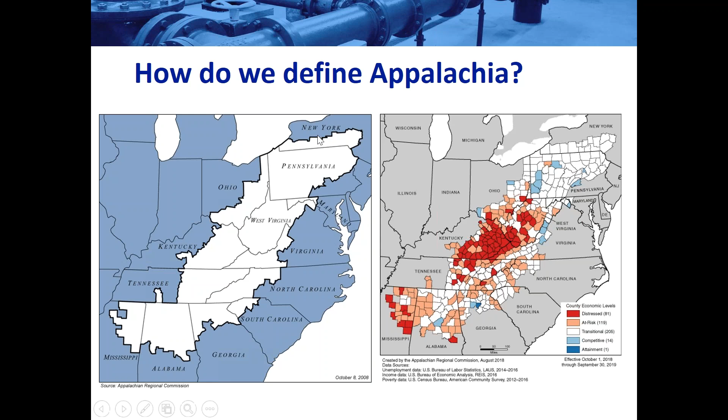Okay, so we've defined Appalachia. So why talk about Appalachia? Well, it's because another project we're doing is a program evaluation of a portfolio of projects related to water and wastewater infrastructure. As part of that, we're looking in depth at each individual project, but also charged with looking at innovations in water systems. Although this content is directed at Appalachia, because it represents so many small systems with demographics similar to other systems across the country, the content seemed appropriate for a broader audience.

Okay, so first polling question—I'll pass it back to Tess, but I'm curious what you guys think of when you hear innovation.

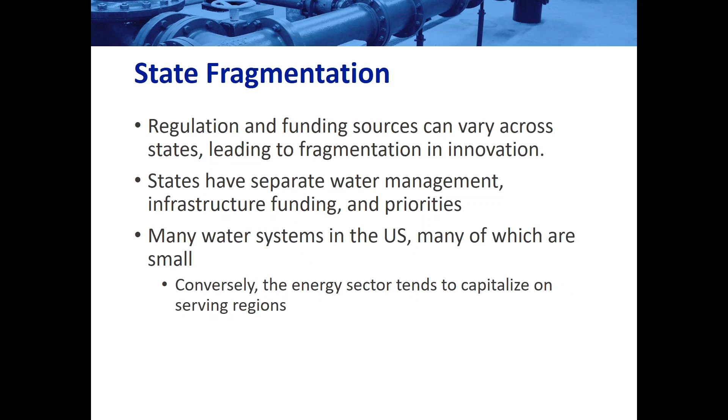And finally, there's state fragmentation, which I mentioned earlier, but it leads to fragmentation in the innovation itself. States have separate water management, infrastructure funding, and general priorities. And there's also, as everyone knows, many water systems in the United States, many of which are small. So it's harder to capitalize on some of these regional innovations that might work on a larger scale.

Okay, so with that, I'm going to transition from innovations to the actual case studies. Up until now, I talked about more scholarly examples as to why it might be challenging to innovate. But there are other things that can be pursued outside of just these kind of scary things you might hear about on the news. That's obviously a prohibitive thing. The media likes to highlight things that go wrong and not necessarily the things that go right. So I hope that through the next examples, I can show some cases where things went right, and maybe some cases where things went right but some hurdles came up along the way, but it ended up okay. So hopefully this webinar will provide a little more optimism in terms of how to overcome some of these barriers and how to be a little innovative.

Okay, so moving on to case studies. These case studies will hopefully provide some interesting examples of what's out there with little capacity or effort involved.

But before we start, just a disclaimer: again, this webinar is not intended to be an endorsement of any innovative solution. They're just examples, all of which have pros and cons and may or may not be appropriate given the situation at your system. So it's important to keep that in mind. Just because it works out at one system does not necessarily mean it's right for yours, or vice versa. If it did work out for someone else and you were to pursue it, it could be something that's right for you, but it's just something to keep in mind.

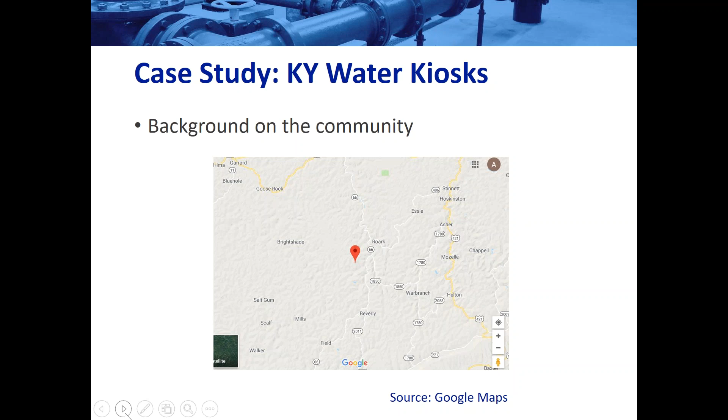And see if maybe that would give me a better idea of what this area looked like. Again, even at this zoomed out level, you can tell that it's mountainous, that it's rural. It's a little unclear the size of the neighboring towns, but this is obviously a really small community. It's not a densely populated area.

This final map helps give a little more context on the location. Basically, it's north of Knoxville, east of the Daniel Boone National Forest. But again, this doesn't give you a lot of context on who lives there, what the community actually looks like, or what I'm actually talking about.

So that's where I'm going to transition to next. To give a little more background on the community, I picked Beverly, Kentucky when I was looking at population sizes, just because it was the closest community nearby. But I just wanted to show side-by-side satellite images here.

On the left, that is the Red Bird Mission, the site of the water kiosk. On the right, you have London, Kentucky. London, Kentucky has a population of about 8,000, a little bit larger, and still relatively small, not super highly populated. But you can tell by looking at these two satellite images how little infrastructure exists near the Red Bird Mission site.

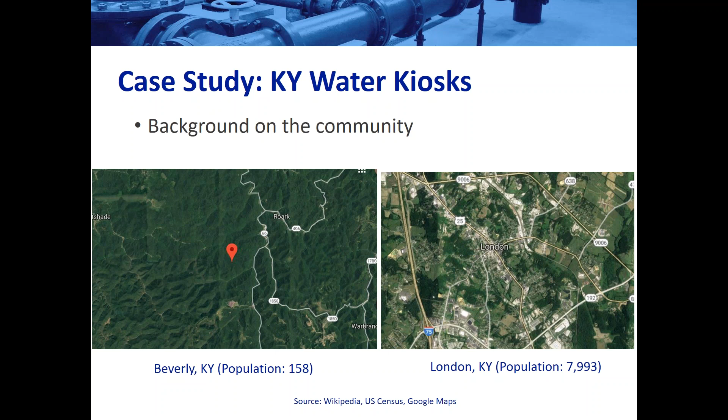More generally, Clay County, where this water kiosk is, in 2010 had a population of about 21,000, and the median household income was about 16,000. Approximately 39.7% of the population was living below the poverty line. It was known as one of the poorest counties in the United States, and in 2010 the Washington Post called Clay County the unhealthiest county in Kentucky, and the New York Times called it one of the hardest places to live in the United States. So sorry to start with a little pessimism, but it really sets the stage for how this all came about and why the innovation was so successful here.

So what led to the implementation of this innovation? Generally speaking, what was the problem? I already talked about how small the population was, but it also had a declining population, low median household income. There were pretty serious water access problems, not to mention watershed contamination problems. There was some water testing conducted between 2012 and 2014, and 64% of the testing sites exceeded EPA standards for E. coli.

Basically, it's a difficult region for septic systems, given the steep terrain and the soil itself. So there are some concerns about straight piping and human waste making its way into surface water, which was contaminating some of the surface water in the surrounding area. In addition, many people within the community were on private wells, which made it challenging from a public health and monitoring standpoint, because there was really no way to ensure that their water was safe to drink.

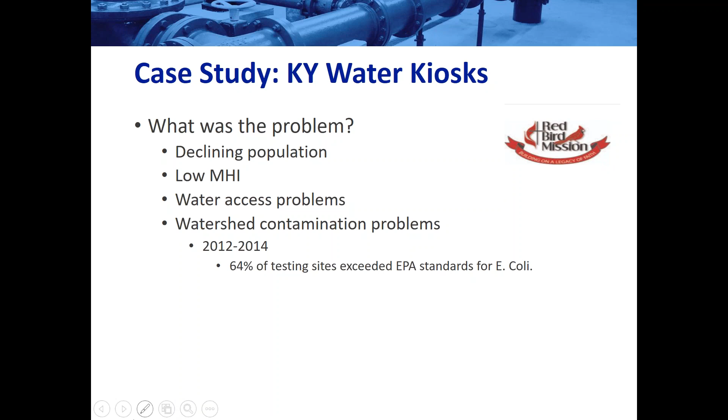Previously in the community, they had tried to undertake a similar distribution strategy to a water kiosk. Years ago, there was a local church that built a well water kiosk, but there was heavy usage, and the church wasn't charging for the water, so they couldn't afford some of the actual monitoring that the state required, and the overuse drained the well. So that previous effort failed, unfortunately.

But based on that, the community decided to reach out. They reached out to the University of Tennessee, and a big, very interdisciplinary group with a lot of different backgrounds came together and tried to see out the process. The team's goals in general were just to share knowledge with the community, to look at the problem holistically, the biological, social, and environmental health standpoints of the actual problem.

The team determined that there was an urgent need for access to clean water, just because of the myriad of environmental and water quality issues that they saw while they were there. There were also concerns about the connection between clean water access and health, particularly the health of Clay County, which Washington Post described as one of the unhealthiest counties in Kentucky, as well as the fact that because people weren't confident in the quality of their water, they were seeking out things like sodas instead, and there were some concerns about diabetes and obesity in the community. So it was a lot of problems all combining to lend itself to this innovation.

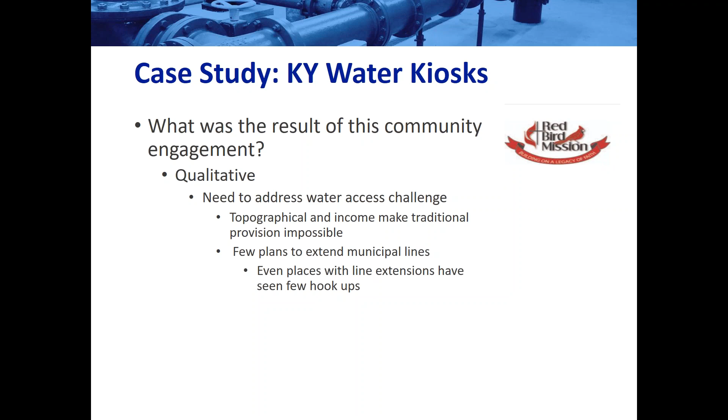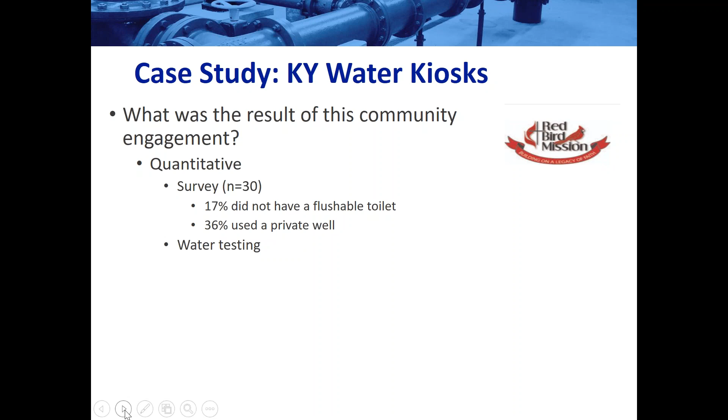Moving on to the more quantitative side, they asked some pretty strategic questions on the survey. It only had 30 responses, but it was a household level response. They were asking how many folks had plumbing in their homes, how many had access to municipal water, and then they did some actual water testing. As you can see from the survey results, 17% didn't have a flushable toilet, and 36% used a private well. Obviously this is just a sample, not the entire community, but hopefully it's representative.

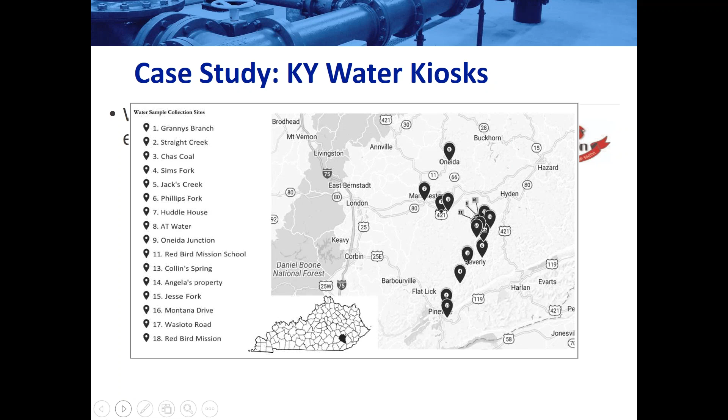Moving on from the background, we're getting into the actual innovation now. So what did the design look like? As the University of Tennessee team was collaborating on this, they really wanted to create a place that had a sense of community, that met all the needs, but also was easy to access.

They came up with a group of ideas, and this is the one they went with. They tried to keep access to it by keeping it adjacent to the road so people could get to it easily. They put a cover on it so that if people walked up wanting to get water, they had a place to stand if it was raining or the weather was poor.

They also added what they considered a community aspect, which was 4 bays added to the side of the water kiosk so they could conduct a local farmers market there, in hopes that it would be a place that gave people identity, which is the last element. They also added a wooden screen, basically trying to dress it up a little so it felt like a place people were proud of and would consider visiting.

An environmental engineer on the team, who had experience with water kiosks in developing countries, helped guide discussions with community partners to gain approval for this system. The idea was to tap into an existing county line that was routinely monitored for purity and fluoride content.

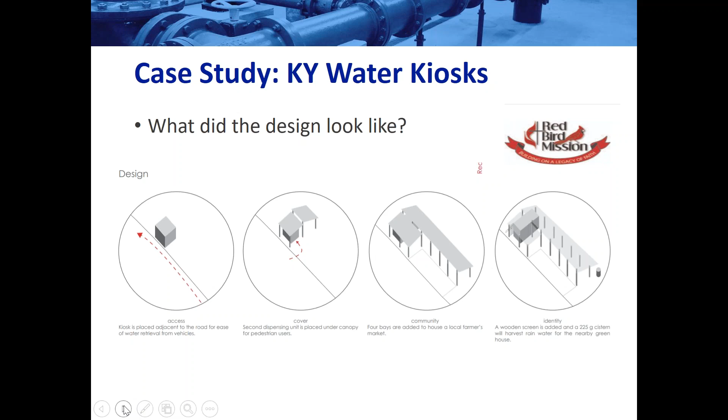So what does the finished product look like? Students at the University of Tennessee at Knoxville came up with these design concepts. It started with 5 design concepts, and based on community input, they tried to create a community space. This was very much a back and forth with community members to ensure they had their say in what the final product would look like.

It was actually built over an alternative spring break. I don't know how many people are familiar with that, but basically over spring break, undergraduate students do some sort of service learning experience. In this case, those students went out and actually built this kiosk.

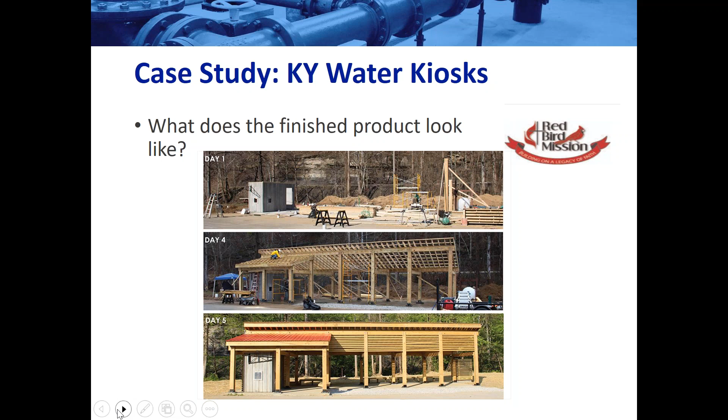Going into more of what it looks like, the next few slides are just photos of the finished product. This is looking at it from the side, and you can see benches around the back, places for people to gather, as well as a sign that says Redbird on it. This is the other side - you've got the rain barrel, the benches, the bays for the farmer's market, and you can see it's running right adjacent to the road.

The question is, who was or is served by this? Because of this kiosk, according to the University of Tennessee's website, 9,000 families in Kentucky now have access to clean, fresh water. In total, 150 people worked on this project, and it took 3 months to dream up and figure out the design and implementation of this water kiosk. But it actually only took about 1 week, the alternative spring break, to actually build it.

So the important part, right? I told you a lot about the background and the design itself, but what really matters is, can it be replicated? There are obviously some serious limitations with this case study, particularly that water isn't provided within the home - there's still the expectation that people have to go and get water themselves.

Also, local stakeholders were really invested in seeing this through, and they had familiarity with it because of other water kiosks they had implemented previously. Not to mention the fact that there was the Red Bird Mission willing to take on the challenge. But again, this is Appalachia - it was a rural community, it was a coal town. There were serious water quality issues, and all of this was really coming together to mean that innovation was necessary if people wanted access to clean water.

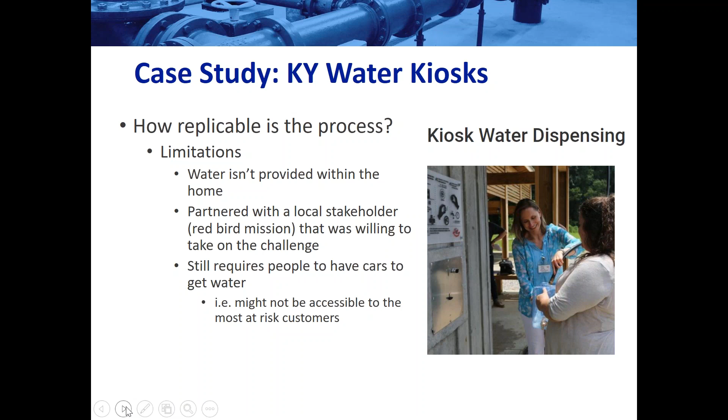We knew that the costs were prohibitive during the first try, and that's why it didn't really succeed. So how are they paying for it?

This is actually straight from the Redbird Missions website, a screenshot of it. It says: safe, clean water filling station provided at a minimal cost of 5 gallons for a quarter, located across from the community store. Obviously it's not a super detailed description, but that's how they're paying for it. Also, if folks don't have clean water containers, they do have that link there, so they provide those as well for people who might come up and need water but not have anything to store it in.

To date, we've largely seen these in developing countries, but for communities with a unique set of challenges, it could be feasible. As I was doing my research, this was something that folks who worked at the University of Tennessee and community members wanted to see in other places, specifically communities they were aware of with similar challenges. So it could be something we see more of in the future. The idea was that the architectural drawings, the design, could be shared and implemented in other regions with similar concerns.

So with that, I'm going to move into the second case study, which is a little bit different. It's basically what I'm considering a non-traditional partnership model, a nonprofit called Dig Deep, headquartered in downtown Los Angeles. You may or may not have heard of them. They've gotten a lot of media attention from NPR, from the New York Times. Also on their website, there's a video of Michael Phelps supporting them, so obviously they've reached a pretty wide audience.

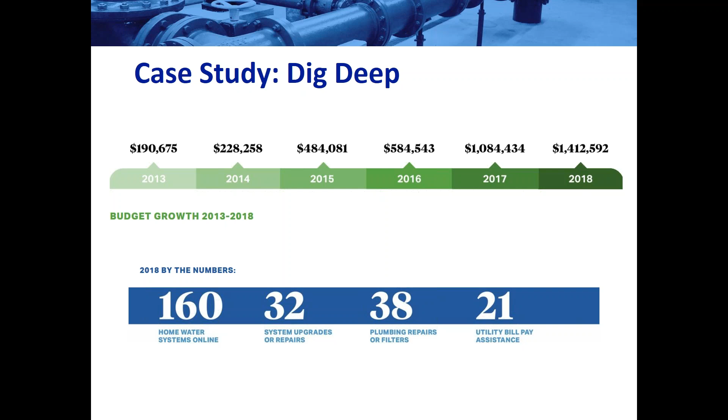So they have 4 current projects: the Navajo Water Project, the Clean Water for St. Michael's Project, the Bring Baby Lisa Home Project, and the 4 Liters Challenge. In general, their projects fall into 2 buckets. There are the water access projects, which are essentially building and managing low-cost systems in what they consider a community-led solution. And then they have education and advocacy projects, where they're trying to connect people to their water, and create a deep and lasting connection to the water we often take for granted.

The project I'm actually going to talk about in terms of innovation is the Navajo Water Project. But the Clean Water for St. Michael's project is designed to get clean water to a special needs school. The third project was to try to get water and sewer to a home where a child had a serious illness. And the fourth project is just education and outreach, essentially aimed to help people recognize what living with water scarcity really looks like.

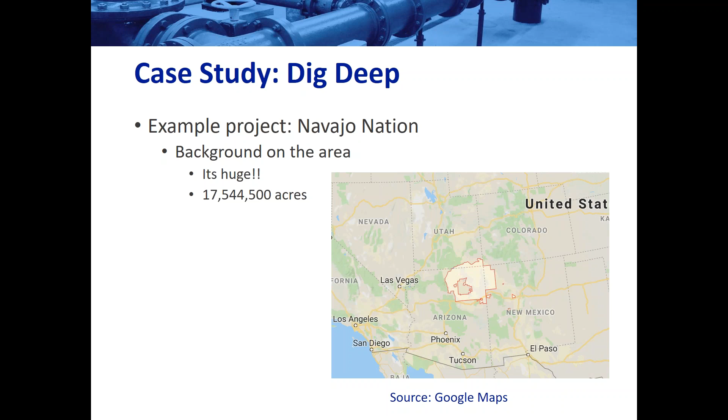Okay, let's talk about the Navajo Nation. First of all, it's huge. I don't know if people are aware of that. I feel like you think about it expanding a pretty large area, but the Navajo Nation is really large. Not that this means anything, because 17 million acres doesn't mean much, but it's 17 million acres, so it's really large.

In general, just kind of general context and background, population is about 350,000, but not very densely populated, only about 13 people per square mile. And the average household income as of 2016 was about $27,000. The average household size is about 3.5.

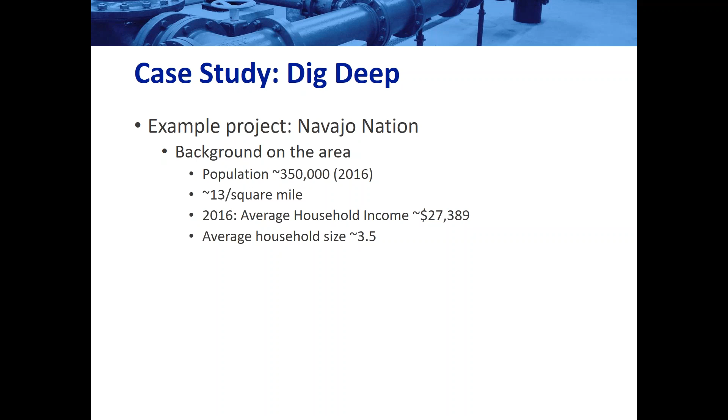Okay, so the actual project itself, what does it look like? There's a link here you can look at afterward if you want to dig in more, but basically the problem they're trying to address started with a smaller project, but it's since expanded now that they've realized how expansive the need is. According to their website, 40% of Navajo families have to haul water every day, and they pay 67 times more for the water they haul versus piped water.

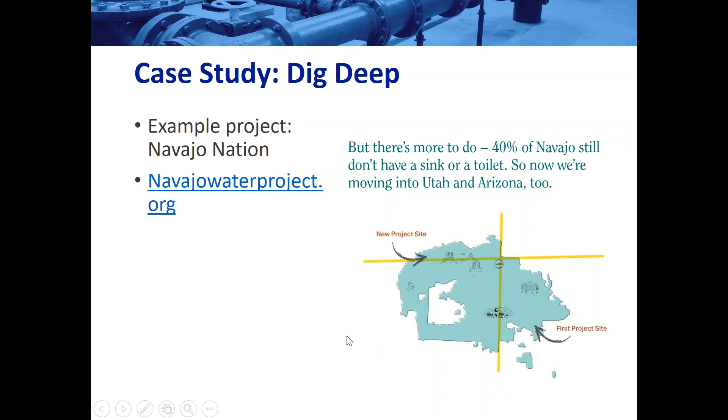So they have what they design, or advertise as an innovative system, which is a community-managed utility alternative that brings hot and cold running water to homes without access to water or sewer lines. They describe it as the first system of its kind in the United States. Again, I'm not an engineer, but I do know, based on information I found while conducting these case studies, what that looks like. So these are the four parts they describe as their innovative system.

They create wells where they develop new sources, where water is pumped, treated, and stored locally. They deliver water in food-grade trucks. They also create home water systems that can provide up to a certain amount of hot and cold running water, and they use solar power. And then, much like the Water Kiosk Project, they really pull in the community, making sure the community is part of all the decision-making along the lines of the actual project, so that they're invested in it and in the end result once DigDeep is no longer there.

And just for reference, they've raised about $485,000 to bring running water and solar power to a remote town in Utah within the Navajo Nation.

So how replicable is this process? There are obviously pretty serious limitations. For one, there's not a lot of information on the actual system they've implemented in terms of the engineering behind it. Again, I'm not an engineer, but even that was kind of coating the surface. In addition, they're a nationwide nonprofit, and the need is much more widespread than their ability to reach everyone. Even with a budget of about $1 million, it would be really challenging to meet everyone. Not to mention that the Navajo Nation is very unique, and the challenges there may or may not be analogous to other areas of the United States. But it is a really interesting group that's trying to bring to light a lot of clean water access challenges in the United States, and they probably have a whole list of interesting contacts and great ideas.

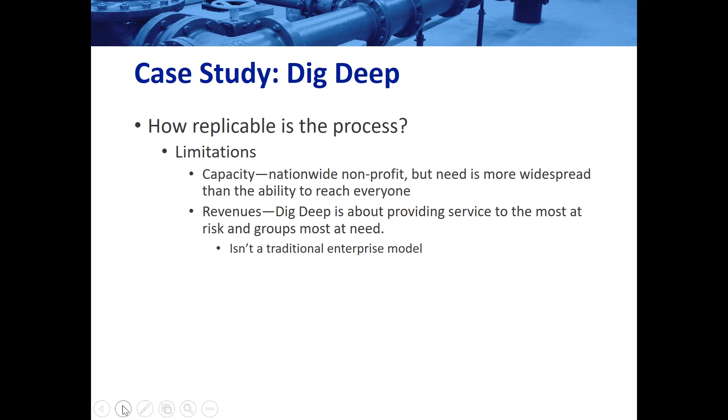So in a sense, they're a non-traditional partnership because they're a group that's doing a lot within the field and seems really motivated to see measurable change. I'm going to talk about this generally because I don't have a ton of time, and there are a couple other case studies that I really wanted to highlight.

NADO conducts a lot of projects that I would consider innovative. That link is essentially to their website which gives a general overview, but they've invested in a lot more innovative water infrastructure projects than I've just listed here. There are several more on their website. The most interesting one, in my opinion, and one that's actually analogous to Appalachia, is the Georgia LIDAR project.

For people who don't know, LIDAR is a type of mapping technology. It stands for light detection and ranging. They coordinated a project involving 22 counties, 3 cities, and 5 regional commissions, using LIDAR for flood mapping and to acquire data for infrastructure related to water, wastewater, stormwater, gas lines, and things of that nature. It's an interesting example of using an RDO, a regional development organization, as a partner on the project, and implementing innovative technology to plan to be more resilient and to plan for infrastructure. It's just an interesting partnership that I was otherwise unaware of.

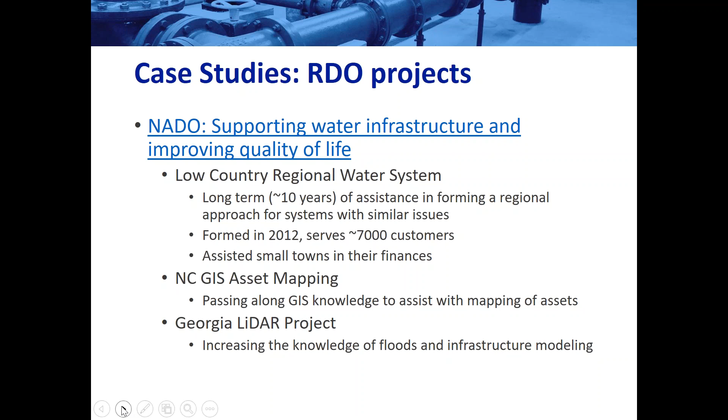The next case study comes from the project portfolio we have through ARC, and it's an example of innovation based on state priorities. This case study took place in Byrdstown, Tennessee. It had a population of about 800 in 2010, and according to their records, they serve about 5,000 people, and were suffering with pretty significant water loss. They're also considered a distressed county, so for ARC purposes they qualify for more funding, but that also means that in terms of their socioeconomic status, they're struggling relative to the rest of the United States.

The project was completed in 2012. It was an ARC project, with total funding of about $625,000, aimed at addressing water loss. They conducted a water loss survey between July 2009 and June 2010, averaging about 45% water loss and peaking at about 55%. That was a huge financial burden for both the utility and the ratepayers. So this case study, this example of a project, was addressing water loss and recovering some of those costs.

The project itself, in terms of being a revenue case study, both addressed a problem and also helped recover some of the costs associated with actually funding the infrastructure that was motivating this change in water loss.

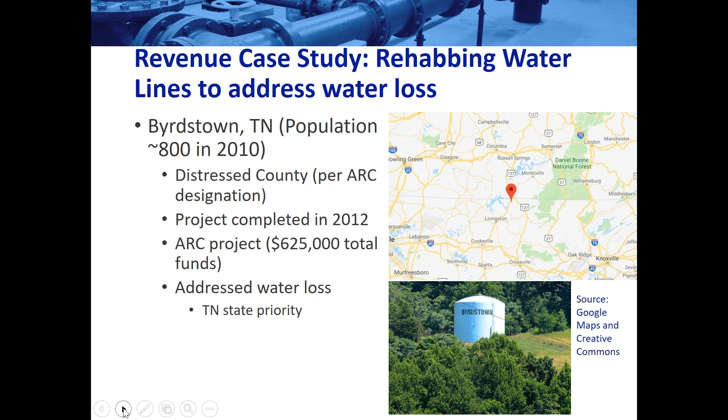So this one's kind of cheesy, I'll say that at the forefront. One of the things I always recommend is using your own data. Be innovative with your revenues by using data that you have on hand and that you can easily get.

Rate setting is very much an art. There are a lot of things you can look at when considering setting your rates, looking at affordability, looking at things like inflation, looking at your billing records and consumption allowances. There are many, many ways that you can go. This isn't an exact example of a case of that, but you can do it yourself. You can use data to think about crafting rates as an innovative financing tool.

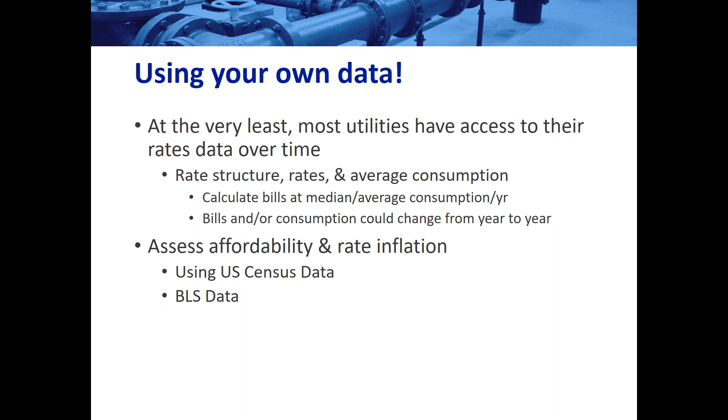The final group of case studies are related to partnerships again, but more so regionalizations and mergers. They're going to be informed by this report from the U.S. Water Alliance, and there's a link at the bottom if you want to learn more after the fact.

The first case study, and really the one that I'm going to dive into, is the Logan Todd Regional Water Commission. The reason I chose this one is because it's in Kentucky. Ironically, it is literally just west of Appalachia, but it has some of the similar demographics and background. The outline of Appalachia is pretty set in stone, but that's not to say that the counties next door don't have similar issues.

For some context, Logan County's population in 2010 was about 26,000. Todd County's population in 2010 was about 12,000. They have a similar median household income of around $30,000.

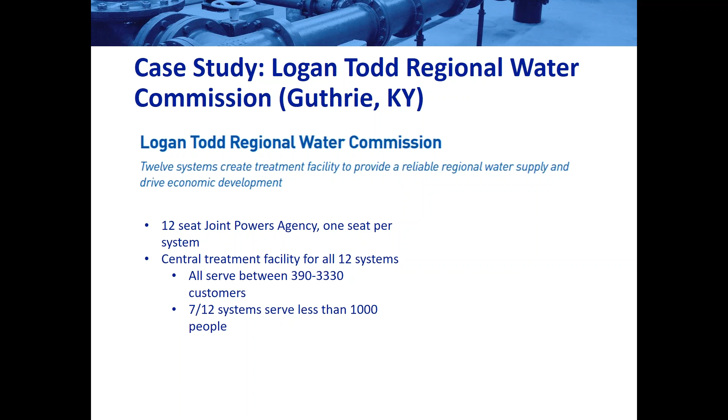It's a 12-seat joint powers agency, and each system has a seat. And that central treatment facility covers all 12 systems. Each system serves between 390 and 3,330 customers, but most of them are very small, serving less than 1,000 people. As a result, from a financial standpoint, it equalized the wholesale rates for all 12 systems, regardless of their size or location.

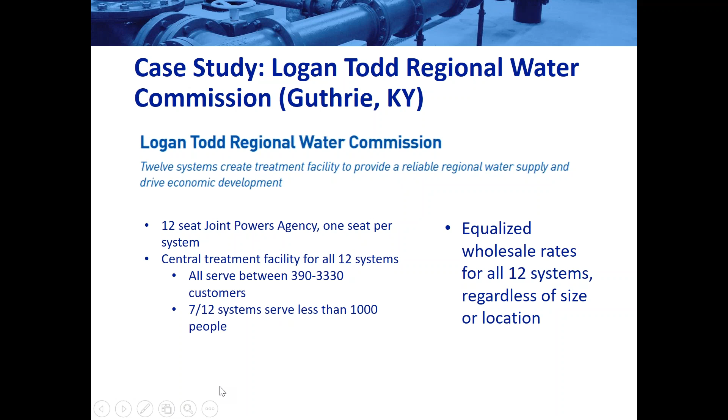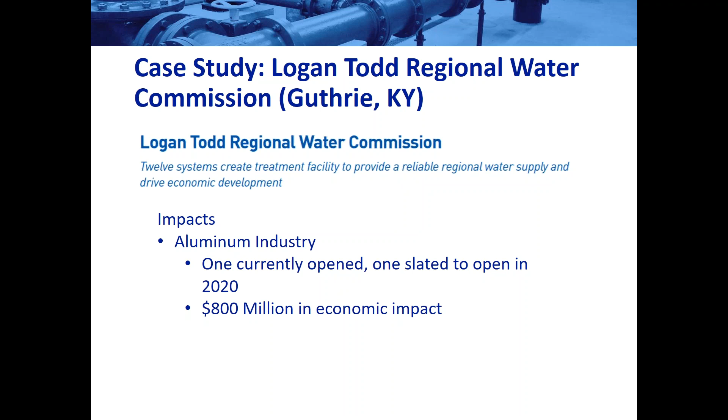What were the impacts after the fact? Well, the aluminum industry came to town. There's currently one big aluminum manufacturing plant that's open and one that's slated to open in 2020. It's estimated that it's going to have about an $800 million impact on the community in the region. And that was largely because the aluminum industry needs a reliable water source. So a lot of that is in response to this Regional Water Commission and this regional solution.

So in terms of resources, the EFCs, all of them across the board, are really interested in creating resources. We recently came out with a couple of unique resources related to mergers and regionalization. The first one is this guidance for interlocal agreements. Once you get this PowerPoint, you can check it out at these links. We have both the full-length version, which really goes into the nuances, and then the more condensed version.

Just as a disclaimer, a lot of the examples are North Carolina specific, but some of the overall themes will translate across states. So it still might be something interesting to look at if you are considering going down this path. Hopefully by the end of the month, we should have another resource related to consolidation. Again, it's North Carolina specific, but it's helpful to know what to expect, what obstacles, things of that nature.

In addition, at our website, we have all kinds of different tools, things to assess affordability, rate setting, all the stuff I was talking about earlier in terms of being innovative with your rates. You can do that by looking at our website and downloading some of those resources.

So finally, last thing before one last polling question, I just wanted to make the case for innovation. These case studies are just a glimpse into innovation. There's a lot more out there than I could cover in an hour and should cover for the sake of everyone on the other end of this webinar.

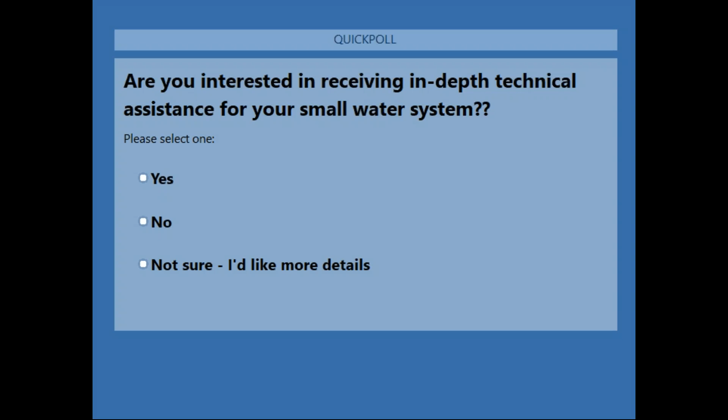And on that note, Austin, there are 2 questions related to your first case study, and I think we can answer them quickly. The first one is, do you happen to know the source of water for the Redbird Mission kiosk? Was it through a bulk source or through a PWS, or do you happen to remember that off the top of your head?

Off the top of my head, I'm pretty sure—and I just touched on it very briefly—but one of the main things the engineer wanted to make sure they could do was get water from the local municipality. So I'm pretty sure that's coming from Clay County, but if that person wants to provide me with their actual contact information, I can follow up with a definite yes, it's Clay County. I know it's a local municipal source off the top of my head, but I can't remember exactly what that source was.

Okay, all right, perfect. I think that covers it. And yeah, we can definitely get in touch with the asker of that question after the webinar as well.